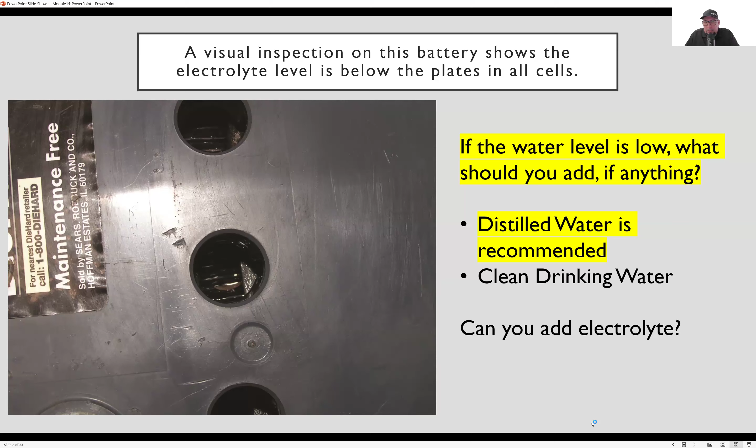We can clean that off, and that's good to do. We should clean it whenever we see it, roughly checking every 3 months and cleaning it every 6 months or so. It kind of depends on the battery. Sometimes you don't have to clean it for like the first 2 years, it really doesn't get dirty, and then all of a sudden, as the battery starts to age, you start to see that more. So you want to clean that off.

Is that recommended? Not really, because they do make cleaning materials, cleaning sprays for batteries. They're available at the auto parts store, just go buy them and spray it on there. They're maybe $8 or so for a can, and the can will last you a long, long time. You just spray it on there and wipe it off. You can use a wire brush too, but those terminals are what we're going to clean on all batteries, regardless if they're maintenance free or maintenance batteries.

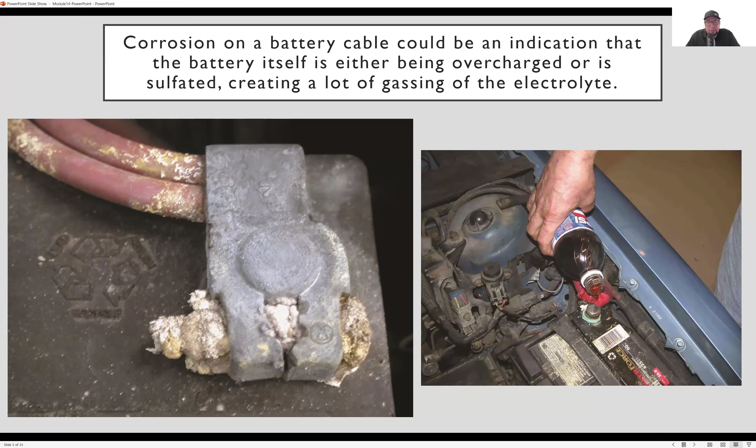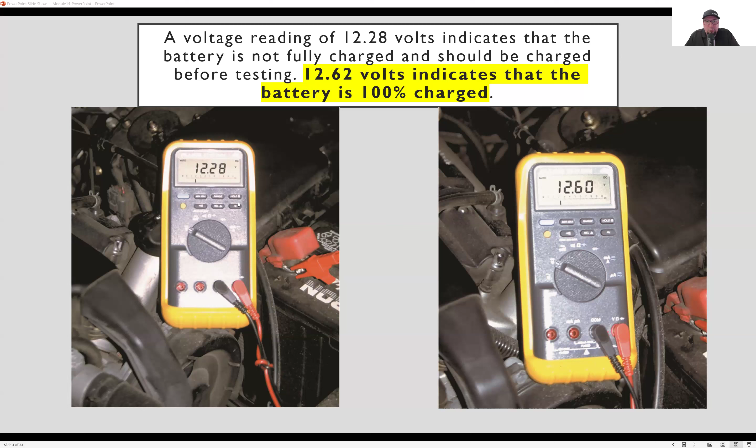Because 12.4 is 75%, 12.2 is 50%. Yeah, I'd say this is more like closer to 60%ish, somewhere around there on the one on the left, the picture on the left. And then 12.0 is really 25% if we go back and look at what the actual percentages are. It goes down really quick. We want to check the battery voltage using a meter, just quickly checking it when the car's off. This is when the car's off. If the car was on, we would be getting alternator voltage.

We can use a hydrometer also, which can test a specific gravity. So if we remember, the specific gravity of a 100% charged battery is roughly 1.265. Now that is a fully charged battery.

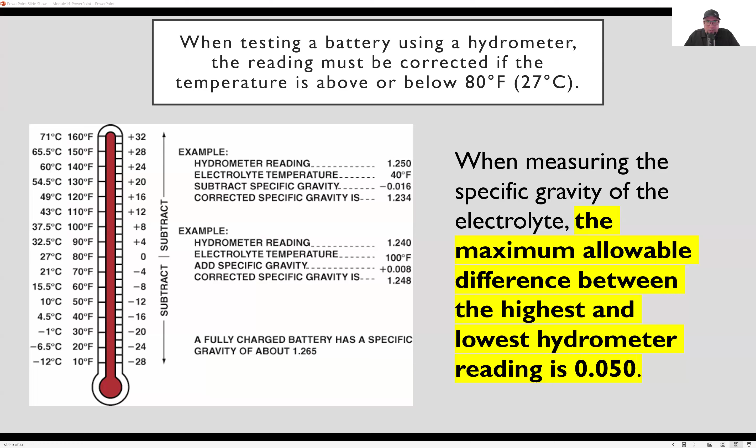Now we don't really do this very much because on a sealed battery, we can't even get to the electrolyte, so it doesn't matter. We can only do this on a non-sealed battery, meaning a maintenance battery where we can add water, but you would need that special tool. It's not something I recommend you go buy. There's battery testers that are available. We don't need to test it this way, but make sure you write down the notes there. Okay.

Again, this is just kind of a recap from when we learned a little bit about batteries. The CCA, CA, and RC. All right. So if we were to load test a battery, which we really don't do anymore, we would test it at half the CCA. Okay. Half. We don't want to use full. We want to use half, roughly. Now, we don't really load test batteries anymore, though. I just want to make that clear. The reason we don't is because of all the computers on the vehicles, but if you ever get asked a question, we would want to do half.

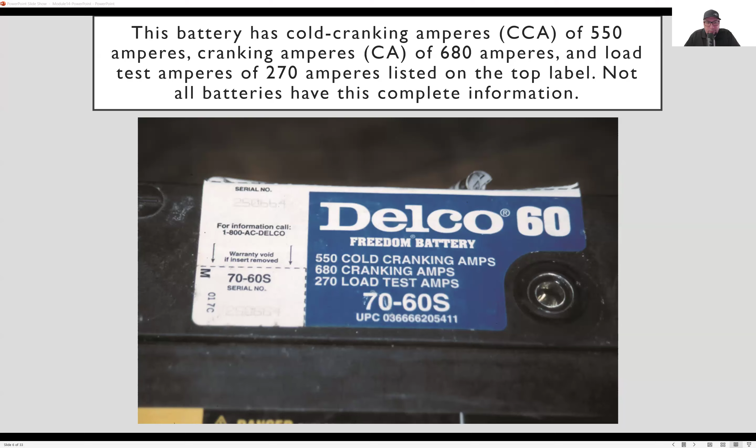If we load test an electrical system, what we're doing is we could create voltage spikes within the system. We could damage control units and stuff like that. So those are the reasons we don't really test batteries anymore.

But the reason we have two batteries is if we wire them in parallel, we increase the amperage, which is the amount of electricity. A diesel engine has a very high compression ratio. And in order to get the engine to turn over when we're first starting it, we need a lot of amperage. And that's why they have two batteries.

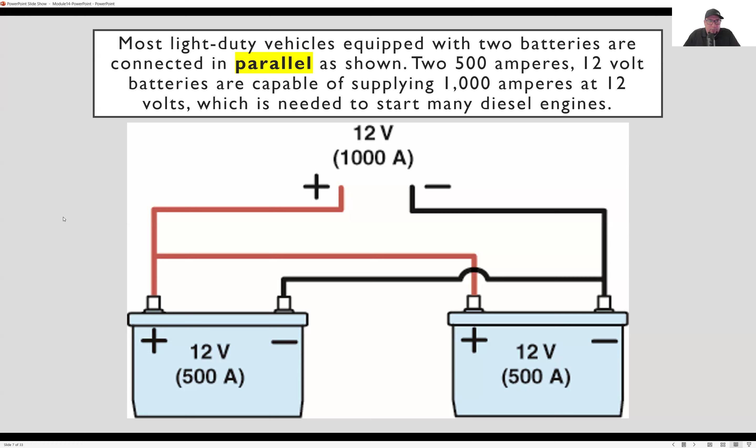On the big diesel trucks, like the Internationals and the Peterbilts on the freeway hauling big giant trailers, they have four batteries. They're still 12-volt systems, but they have four batteries wired in parallel. And that, again, is to increase the amperage to be able to turn over those big giant engines because they have such high compression ratios and such big components inside of them. So that's where we would encounter parallel batteries, in a diesel truck.

If we have two batteries in series, we would have 24 volts. So we're increasing the voltage, but the amperage is staying the same. The only ones that really use this are buses. Buses often run off 24 volts. Transit buses, like OCTA, would have 24 volts.

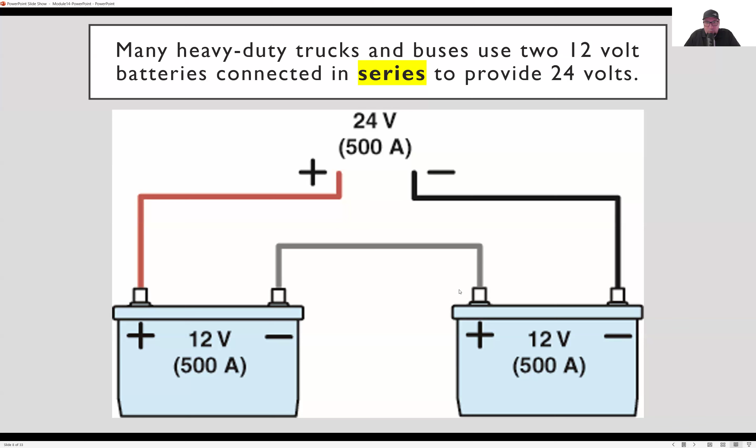Sometimes they would have four batteries, two pairs wired in parallel and then the two pairs wired in series. So you still get 24 volts, but you're getting increased amperage, not as much as if you wire them all in parallel, but a step up, so to say. So there's different ways to wire batteries inside vehicles. On our vehicles, we're used to just one battery, and that's how most cars are. If you see a parallel or series battery setup, you're talking about heavy duty vehicles.

They are a conductance tester. Conductance means testing the internal resistance of the battery to see if it's good or bad. That's all it does. It'll give you a rating. It'll tell you bad battery, good battery. You know, it could tell you how much life is left of the battery too.

You connect it to the terminals, car's off. It's going to ask you questions. Mainly it's going to ask you what the CCA is. You enter the CCA, whatever it says on the battery. That's why we need to know that. And then you hit test. A couple seconds later, it goes through its little diagnosis process. A couple seconds later, you have a printout.

You have some data that tells you if the battery is good or not, and tells you what the charge is usually, and it may even tell you what the percentage of life left is on it. Okay, and then by that you're determining if the battery is good or bad. Are these things reliable? For the most part, they are.

I have seen where they'll say the battery's bad, then you go and charge the battery, then it comes back, you test again, then it tests good. So does that mean the battery's bad or good? It means that it's getting close to the point where you may need to replace it soon, say within the next 6 months or so. Okay. If it tests good all the time, good, the battery's good.

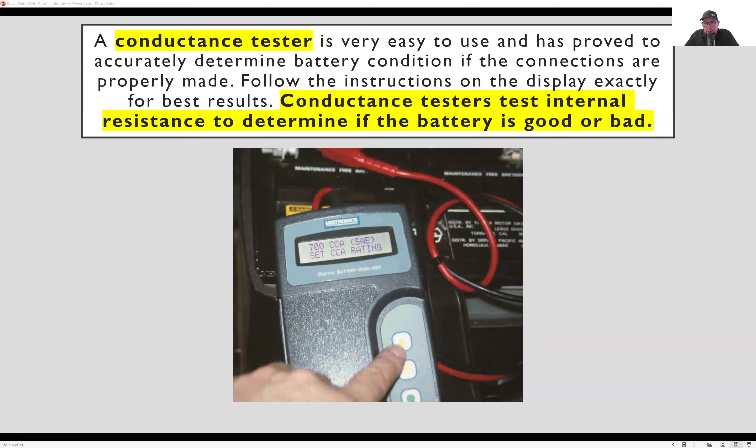Charging. So if we want to charge a battery, there's a couple guidelines here. Make sure you write these down. I'm not going to go over every single detail, but when we charge a battery, we can charge it at different amperage ratings. Meaning, if we want to charge the battery really, really fast at high amperage, we can do that. Or if we want to trickle charge it, which means charge it slowly over time, we can do that as well.

Now, if we charge a battery really fast, we can charge it at 60 amps, but I would only do it for, say, 10 minutes at the most, maybe even less. You know, that's one option. The other option is to charge it at, say, 5 amps, but we can do it for 2 hours. Which is better? The slower way is better, but it takes a lot longer.

Okay, because the slower way, if we only charge it at 5 amps or 10 amps, but we charge it for an hour or 2 hours or even 3 hours, it's going to take a long time, but it's better for the battery because it doesn't heat it up as fast.

But if we got to get someplace and we just want to test the battery, we can charge it at 100 amps for only 10 minutes, 5 minutes. It'll heat up the battery quicker, but at least we get a quicker charge out of it. Depends on how much time we have. Okay. So there's different options to charging batteries. We're definitely not trying to get the battery too hot though, because that's when we can damage it.

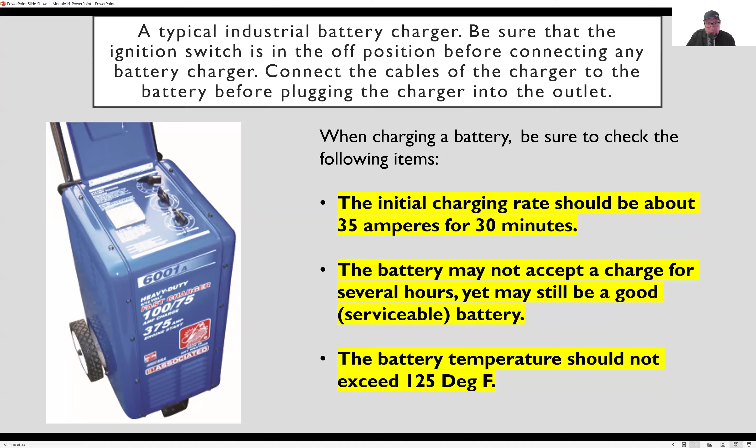If we're ever testing parasitic draw, which is the amperage that the vehicle is taking from the battery when the vehicle is off, there's always a small, tiny little bit of amperage that the vehicle is taking from the battery at all times when the vehicle is off. Okay. It's very, very small. We're talking 30 milliamps, maybe 20 milliamps. Hopefully no more than 50 milliamps. But that's okay over time.

So you can't leave your car there for 1 year, come back in a year and expect the battery to be good, because it's going to be drained by that point. But for the most part, most batteries, if you leave your car there, the vehicle should be okay with, I'd say, a couple months, 2 months, maybe 3 months, depending on the vehicle.

You should be able to get in the car and start it up, and the battery should not go dead. If you're talking like 6 months or more, maybe anything over, say, 4, 5, 6 months, it's hit or miss at that point. It depends on the vehicle, depends on how good the battery is and what the temperature is outside over that period of time. But naturally, you should be able to just park your car for a day or two, start it up, and no problem.

If you have a parasitic draw, meaning that the vehicle is drawing too many amps from the battery when it's just sitting there with the car off, you're going to have a parasitic draw that can drain the battery. Now we can test for this, and there's a couple different ways to test this, but I use a multimeter. That's probably the best way to test because it's very accurate. But it does require you to disconnect the battery cable, and that's what this tool is here. This tool is for you to disconnect the battery cable.

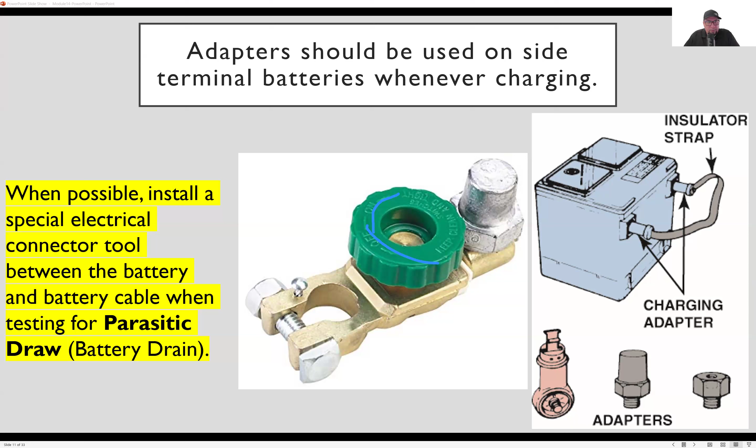If you have, say, two vehicles, like one is your weekend car and one is your daily driver, you might want to install this on your weekend car, because you may not drive it every weekend and you don't want your battery to go dead. So what you can do is, you see on the top here, you can turn it off or on, meaning you can disconnect the battery or connect the battery. So if you disconnect it, then the car cannot drain any amperage from the battery because it's not connected. Okay. Instead of going in there every time and physically disconnecting the cable, this is a quick disconnect from the battery. It can be used for testing or for storage as well.

Okay. This is if we're going to connect jumper boxes or jumper cables. So I want you to really read this and go through it. I'm not going to go through it, but I want you to read this, maybe pause the video and go through this because this may be on the quiz. Okay.

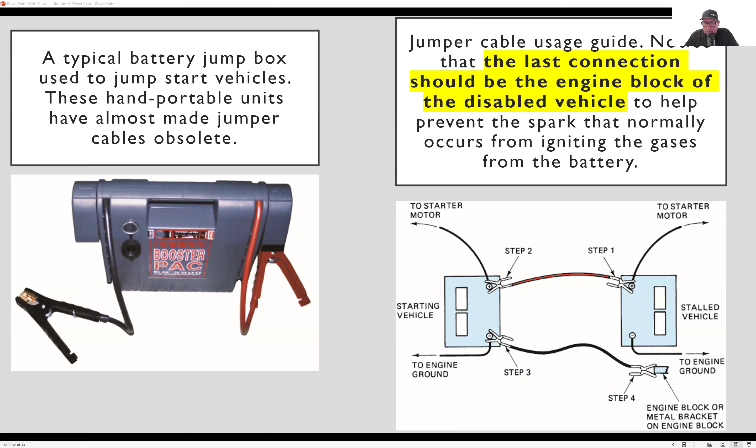Most batteries, especially if you buy them new, are going to have a date on them. Okay. Now, that's the date that it was built. It goes by month and year. So when you buy a battery, make sure you buy one of the newer batteries. If you're buying a battery that's been sitting on the shelf for 6 months already, and they want to sell it to you, if you're okay with buying it, I would highly recommend that you ask for at least a discount because it is old. But yeah, batteries do have dates on them.

And again, a battery should last roughly 3 to 5 years. I would say 3 at the minimum. Honestly, 4 is probably more likely nowadays. And even 5 is pretty good. You know, if a battery lasts you 5 years, you're doing good. That's a good battery that lasts a good amount of time. I have heard of other batteries lasting longer, which can happen. I don't see it that often, but it can. Okay.

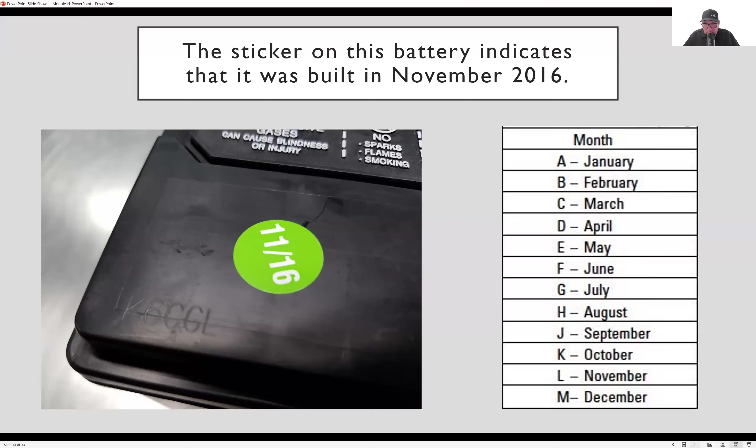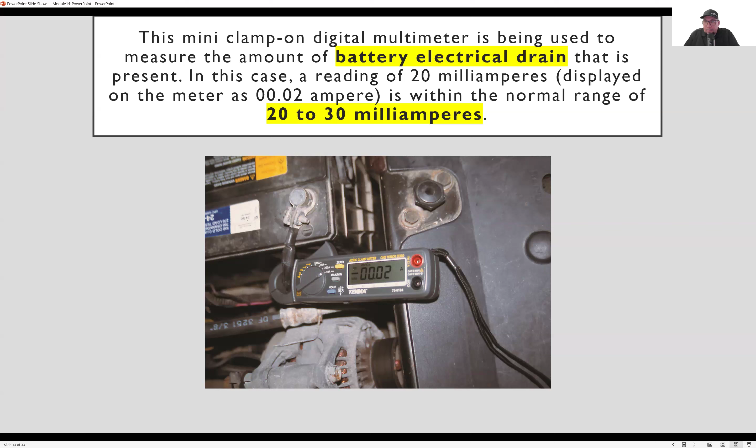And if we wanted to go back to that parasitic draw issue I was explaining earlier, instead of using a multimeter, we could use an amp clamp or an inductive amp meter, which is what this tool is in this picture. We just put it around the negative battery cable, and we just let it sit. We're looking for, again, no more than 20 to 30 milliamps, but in reality with new cars, because there's so many modules on these vehicles nowadays, it can go as high as 50. I've even seen as high as 70 milliamps, and that is okay. But yeah, this is another way to test for amperage drain.

This is kind of an old picture here from an old vehicle. If you ever take your battery out and there's a message on the older radios that says code, that means you need a code to be able to use the radio. They did this to deter theft. Okay, so people wouldn't steal the radios, because if you stole the radio, you would need a special code.

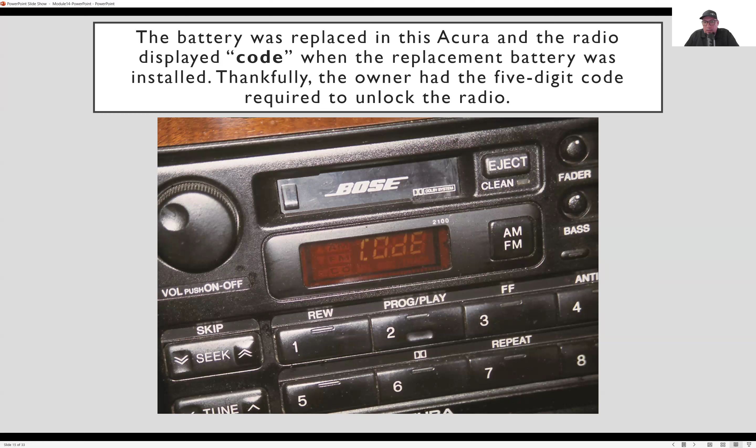The only way to get the code, if you don't have it already, is to go to the dealership and ask for it. You have to show that you're the owner of the vehicle, show your license and show your registration. That's on older vehicles. You don't see it much nowadays.

This is just an example of where you can use a 9-volt battery. If we connect a 9-volt battery to the DC outlet, if we have one on some vehicles, a lot of modern vehicles don't have it—they have USB outlets nowadays. But if you had the old cigarette lighter type of plug, you could connect a 9-volt battery to it, and this could be used as a memory saver when you disconnect the battery and change the battery.

Because when you disconnect the battery, you're removing all the memory from the vehicle, meaning even the radio. So when you connect the battery back up, you're going to reset all the radio stations, or the customer would have to reset them. Some people don't like that, and sometimes it loses memory, like the seat memory and stuff like that. So one way to avoid this is to connect a 9-volt battery to the DC socket, if the vehicle has that feature. Not all vehicles have that feature though.

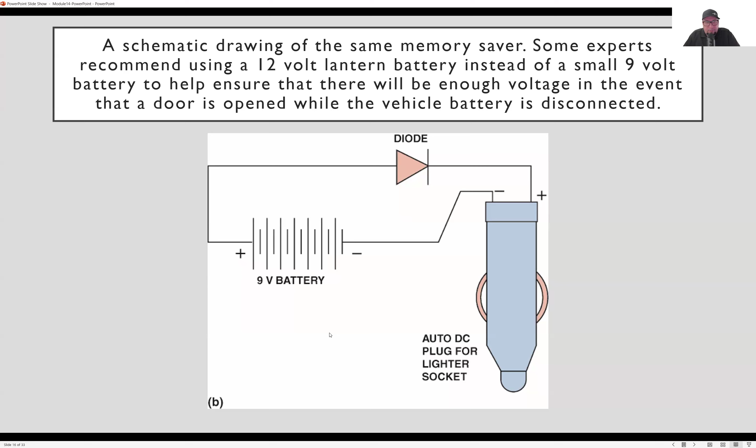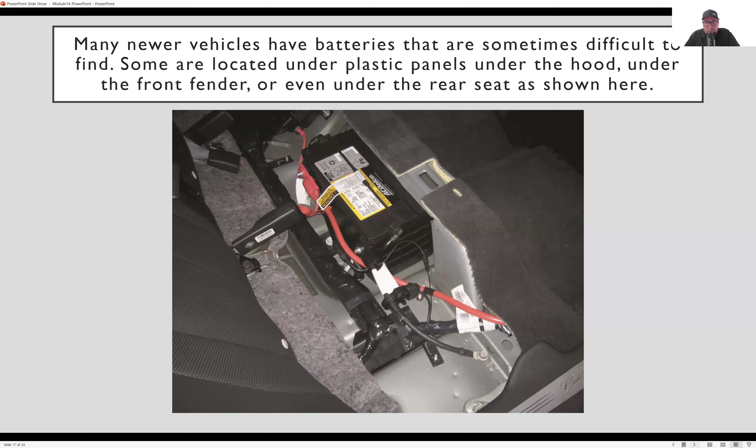Now, locations of batteries. Where can the battery be located? They can be located under the back seat—this is the picture we're looking at. It can be under the back seat, or under the passenger seat. The most common places are under the hood and in the trunk, but they can be anywhere. Corvettes have them in the fender lining, so you have to take off the left front wheel. There are different places where we can have them.

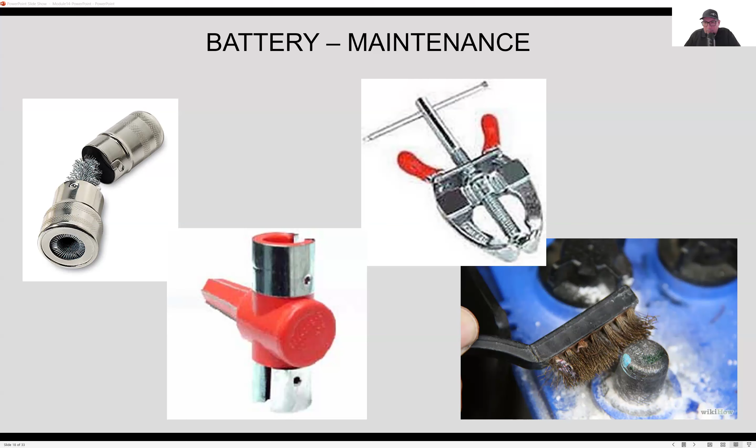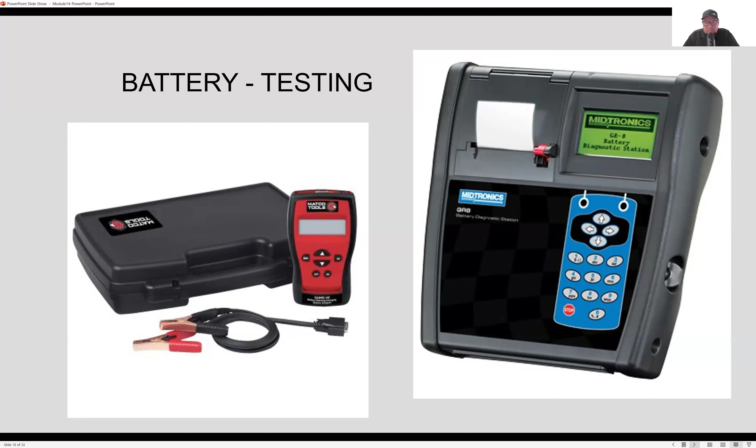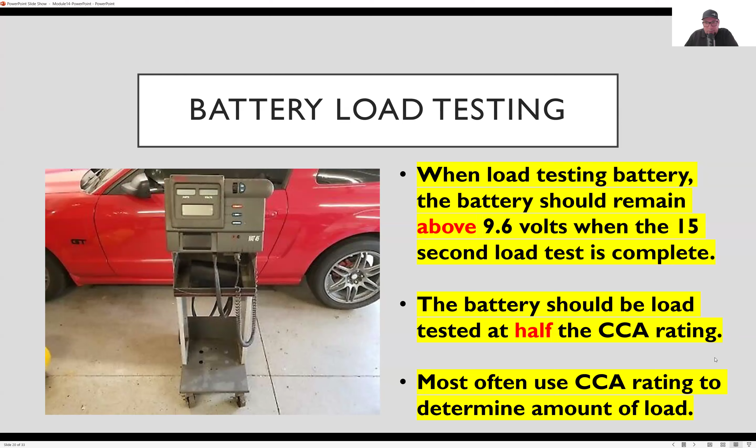Now let's get into part two, cranking system diagnosis and service. Cranking system again is starters. If you want to take a break, this is a good time to pause and come back.

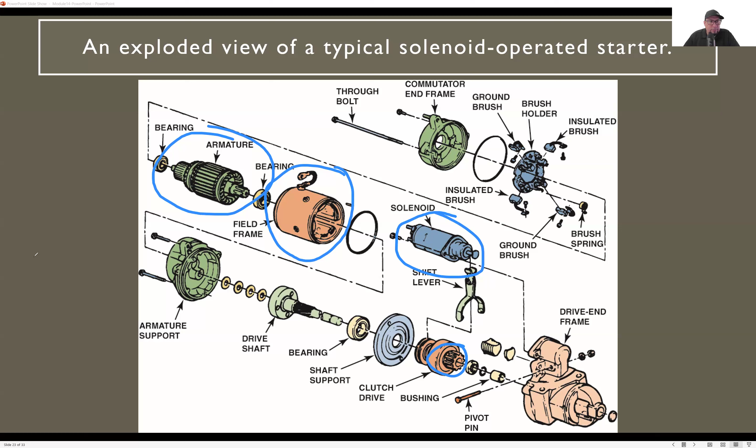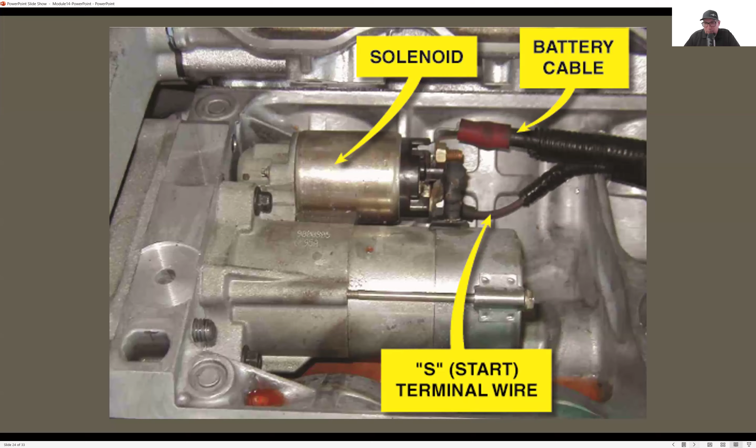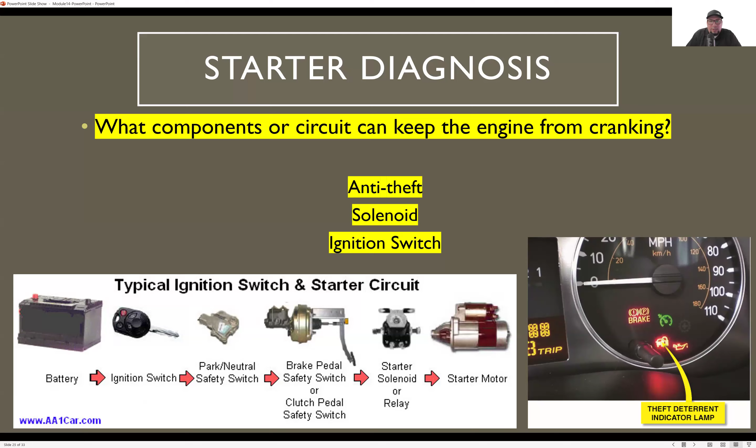Now, symptoms. Vehicle does not crank fast enough to start the engine, has a slow crank. So a slow crank means the engine is turning, but turning slowly. That's not an electrical problem in the sense that there's no power to the starter motor, because the starter motor is actually working. That's when we're going to start looking at the battery. We're not looking at the starter itself because the starter is working, it's turning the engine, but turning it slowly. We're looking at why is it turning it slowly.

Maybe it's not getting enough power, not enough electricity, because the battery is discharged or bad. Or there could be something wrong with the battery cables themselves, maybe burnt up or worn out, and they're taking some of the electricity from the battery that was meant for the starter, being lost within the cables. So we want to do a voltage drop test on the cable to see how much voltage we're losing from the battery to the starter. Those are things we would want to check.

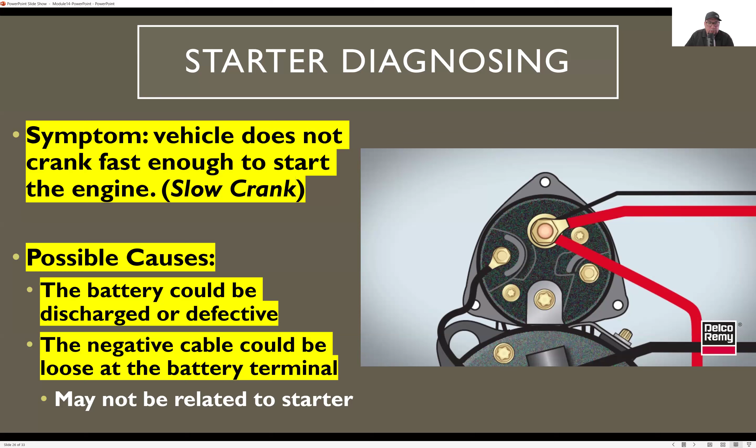Now, slow cranking and excessive current draw. We're going to put a current or inductive amp meter on the battery cable, then crank it and see how much current. On a traditional 4-cylinder engine, the starter motor should draw anywhere between 40 amps to maybe up to 90, even 100, depending on the compression ratio of the engine. So it's a big range, and I'm just talking about a normal 4-cylinder, 2-liter engine, nothing excessive, no high performance, just a normal standard engine, roughly around there, within that 50 amp range.

Now, if it's drawing 150 amps, then there's something wrong. It should not be drawing 150 amps on a normal 4-cylinder engine. That'd be more for a V6 engine. A V6 engine should draw 150 amps normally, but a four cylinder should not, and if it's cranking slow, now we're looking at something a little bit different, maybe mechanical faults within the engine. Something's wrong with the engine, you could have a bent connecting rod.

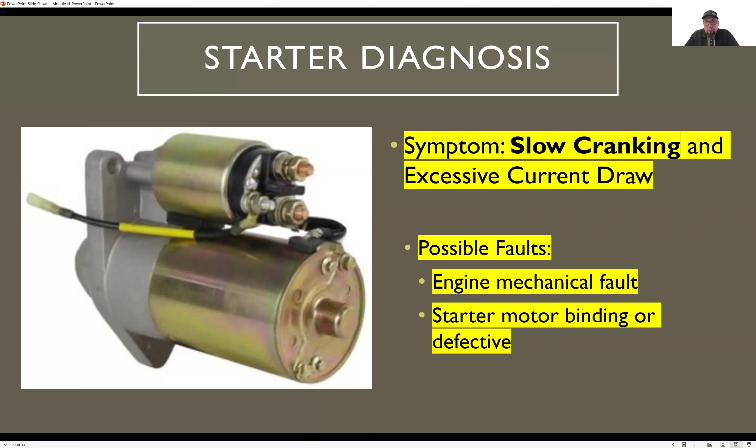You could have a spun bearing, meaning it's putting a load on the starter motor. It's not allowing it to turn effectively, and it needs more current to be able to turn, so it's drawing more from the battery, which is not good. Something mechanically could be wrong with the starter motor or within the engine itself. So that's what we're looking at when we're talking about slow cranking and excessive current draw.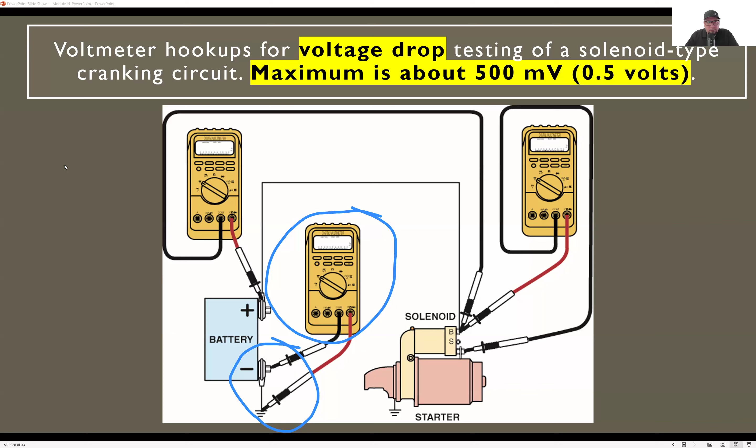And this is on the ground side. Let me go back with just one picture. The one that this next slide is showing is this meter right here, this connection, I just circled it real quick. Now this picture is showing that over there, we should only lose 0.2 on the ground side. If we want to check the ground connection between our negative post and the ground connection, where it leads to, it could be to the block or to the chassis, we only want to lose 0.2, which is a very, very tiny amount. We shouldn't be losing a lot at all on the ground side. That's what this is explaining and showing here as well.

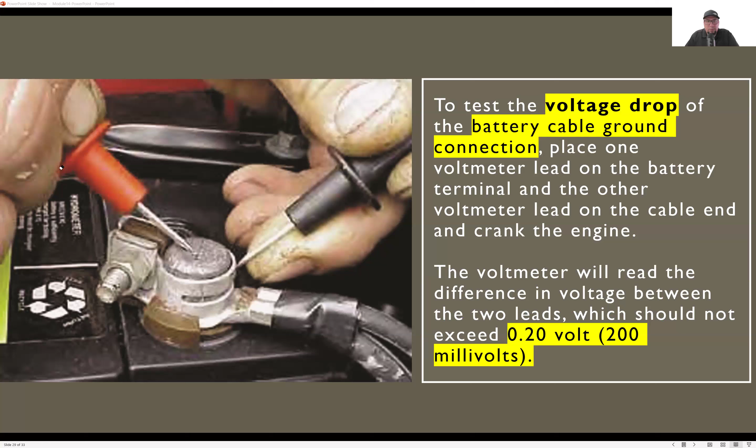In the last couple slides here, we could use this, this is more for if you're going to do a physical test or actually do the test on the starting system. We want to use the GR8, which we do have in our lab area, and we would do that in the lab portion of the class. We would check starter draw, amperage, battery capacity, alternator output. We would do all those checks with the GR8 on a physical car with it running and working. To do that in the GR8, we would go to the system tests. So if you're interested in that, be sure to take the lab portion of the class if you aren't already.

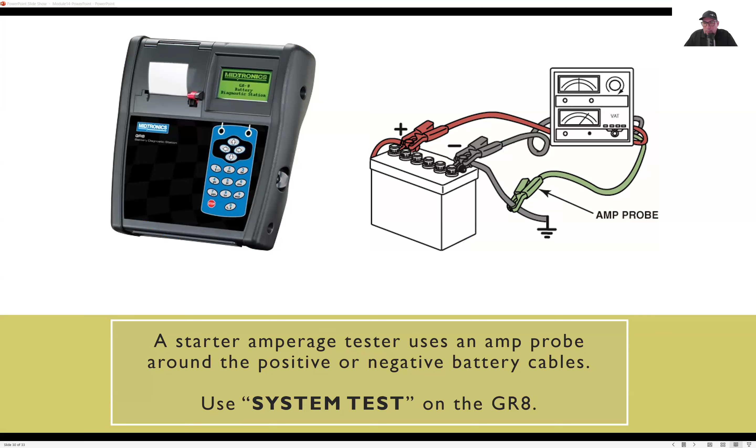Now, the last couple things, the last two things we're going to go over. The last two things here, again, write this down.

Sometimes we can hear a high pitched noise. If we're hearing noises when we're starting the vehicle, and that's only when we're starting, not when it's just driving down the road, we're going to look for the gear where the solenoid kicks out the gear of the starter motor and touches the flywheel. That's the most common place we would find noise, and that's something we'd have to check first before we start digging around on other stuff, because that's going to be the most common thing.

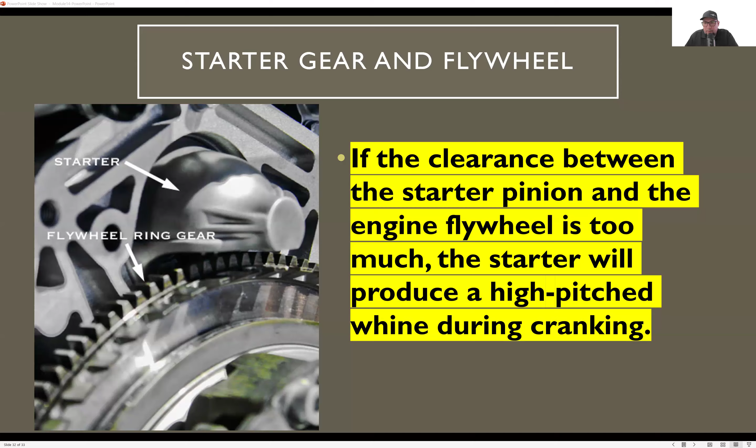But what we're doing is physically testing the starter motor to make sure it turns and spins on the bench before we put it in the car. And after, if you finish rebuilding a starter motor, you'd want to bench test it then as well, just to make sure it works. Because you don't want to get a new starter motor from the parts store, put it in, and then find out it doesn't work.

So we want to take it from the parts store. That has happened before, not all parts stores sell 100% perfect parts. You can get a bad part from the parts store that is supposed to be new. We can get a starter motor, put it on the bench, test it, connect it, make sure it spins, make sure it works. Then we can put it in the car just to verify. It may still be bad when we put it in the car, but the likelihood of that is going to be very, very, very slim.